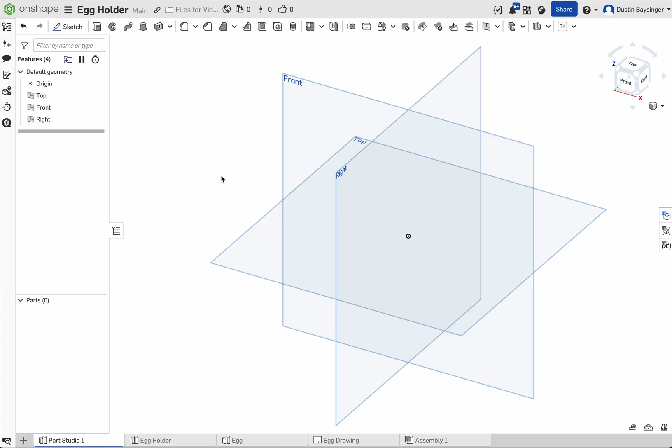First thing we're going to do is open up a new part, and we're going to start on the part that holds the actual eggs. So we click the sketch button, click on our top plane, right click, view normal to sketch plane, and start with a center point rectangle.

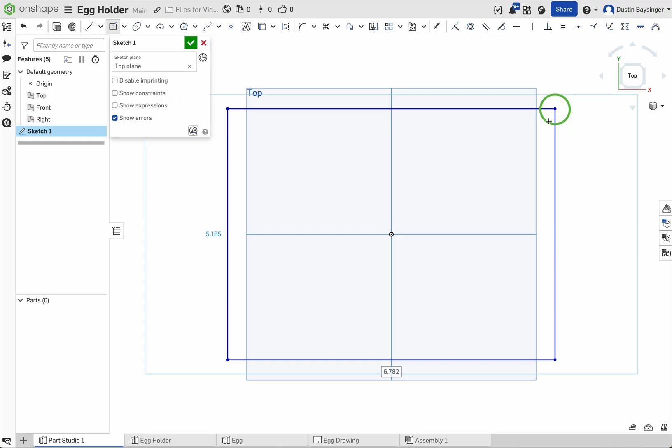We're going to have 3 holes to start out with, and we're going to linear pattern these 3 holes.

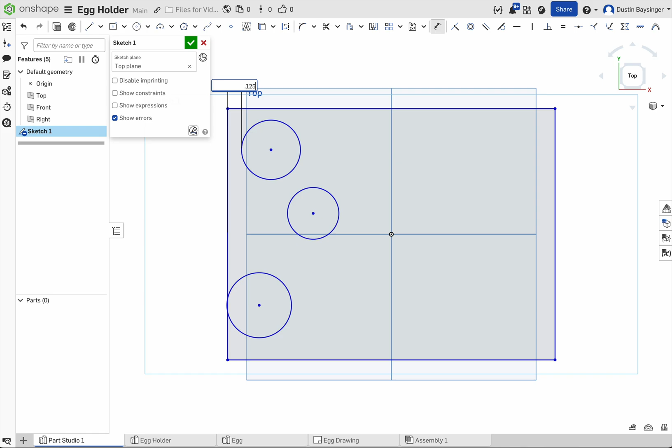So one, we'll start at the edge of our rectangle at 0.125, and we're going to dimension the other side too, and give it a starting point. The actual hole, which I sized based on some trial and error, is going to be 1.4 inches.

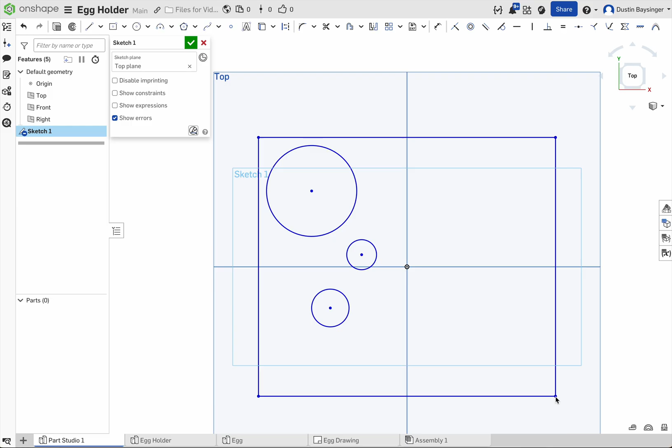That'll pretty much fit most eggs. I've got some small eggs and big eggs that I tested it on, and each of these holes is going to be 1.4 inches.

So we can go up to our constraints and click on the equal sign, then click on each of our 3 circles, and that's going to make each of them the same exact size.

Now these circles are going to be about 1.5 inches away from each other, and we're going to stagger them so that they won't touch, but still use the space efficiently.

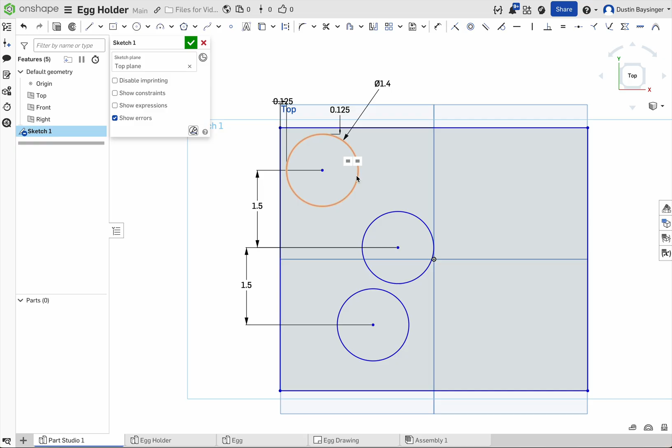Here we're going to create our pattern, and we're going to click on all 3 circles. We're going to use a linear pattern right here.

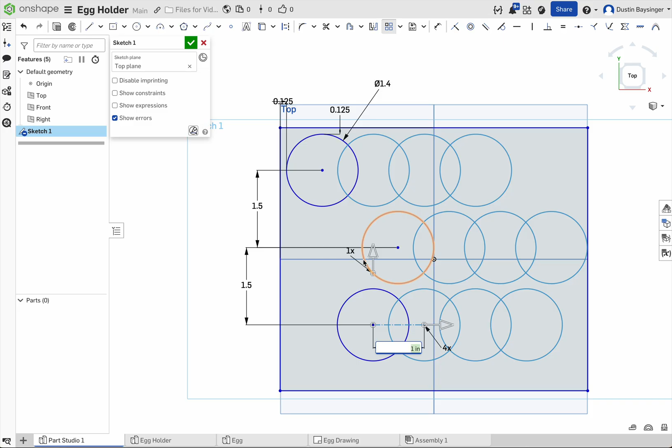And we're not going to do 3 circles, we're going to do 4. That'll give us our dozen eggs. In between each one of these, it's going to be 1.75 inches. That'll give us a basis of where to go with our circles.

We're going to do a left click. That'll make our linear pattern permanent.

Our circles are a little all over the place, so let's set up some constraints so we can pull everything together. This set of circles is going to be at the center point of this, so let's add a point onto that line, and we're going to do a vertical constraint on both points, which will keep everything lined up.

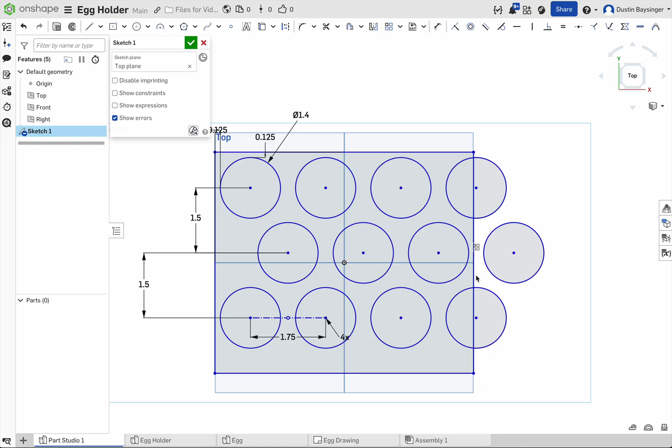We're going to make our rectangle a little bit bigger, and all we want is 1/8 of an inch of material from the outside rectangle to our hole. We'll do that in both directions, and that'll give us our baseline for our eggs.

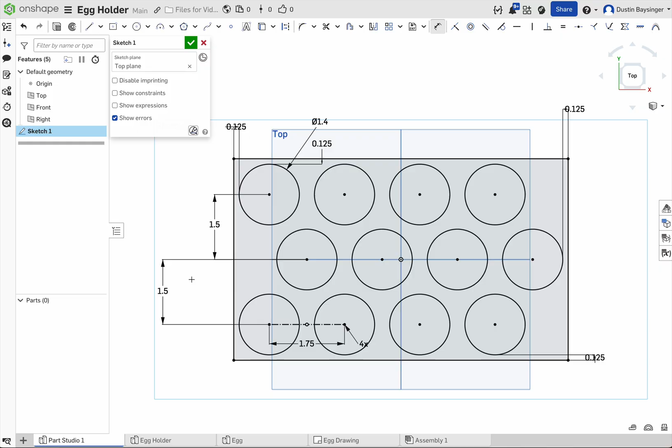Now we're going to click on it and do an extrude. This is going to be 0.1875 inches, to give it a little bit of thickness so it doesn't bend.

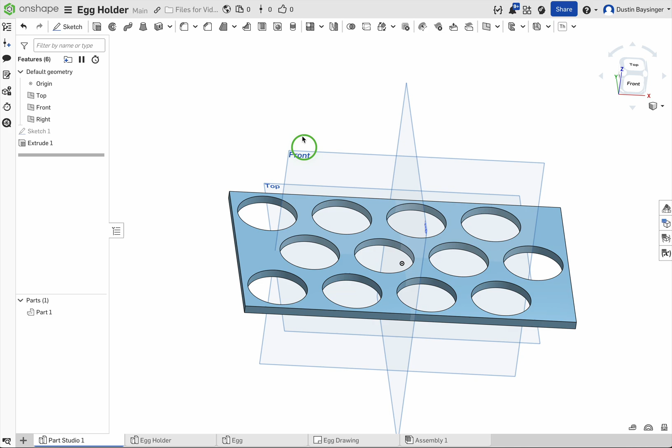Then we're going to start on the handles on each side, which gives it its stackable ability. So we're going to create a sketch on the side, right click, view normal to sketch plane, and do another center point rectangle. We're going to click on the center right there.

This rectangle needs to be lined up with the edge of our base, so we'll click on that. And the entire thing is going to be 3 inches high.

Actually, we don't want the base in the middle — our eggs are going to stick up the top right here. So we're going to take the constraint we have and delete it, and instead constrain that rectangle vertically with the origin.

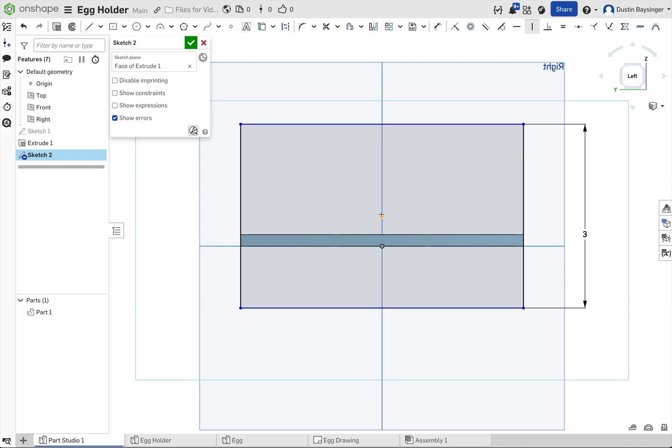Now we'll dimension the bottom here to bottom there, 0.75, and that'll give us the base for the handles.

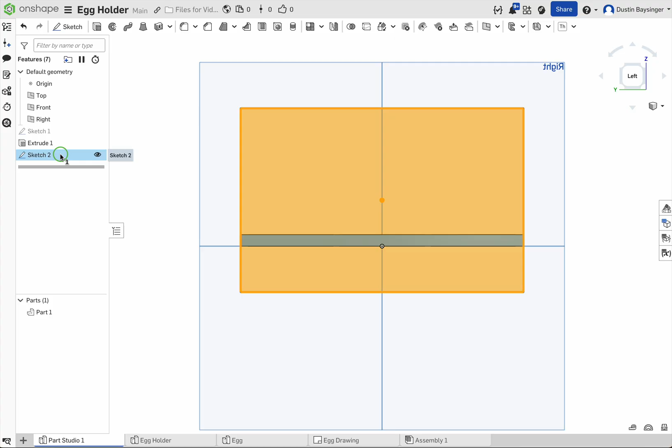Now we'll click on the sketch and extrude. I'm going to extrude 0.25 inches.

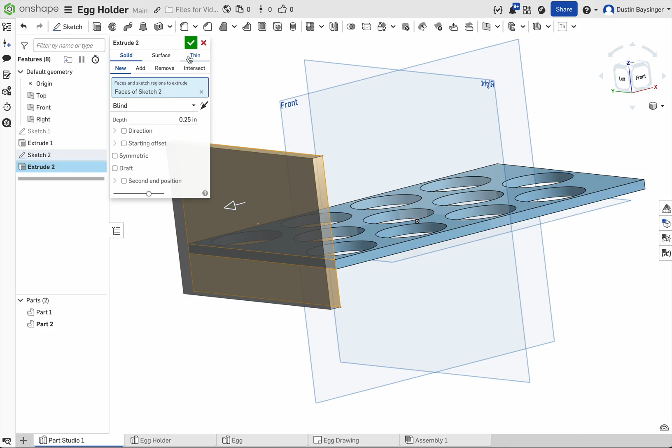Now, I did combine these two parts, the two extrudes, but we're actually not going to want to do that. So go back to the extrude, and make this new instead. Since I don't want to design this twice, one on this side and one on this side, we're going to mirror it once we're done with this side — I can just click on this part and mirror the entire part rather than a bunch of features. That'll make it easier for us later on.

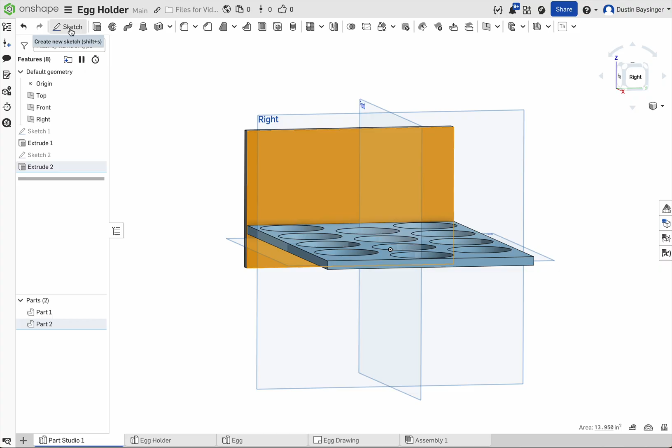Next we're going to make the more stackable parts. Let's create a sketch on the inside, right here. We're going to do a right click, view normal to sketch plane again, and create a basic structure of our stackable area.

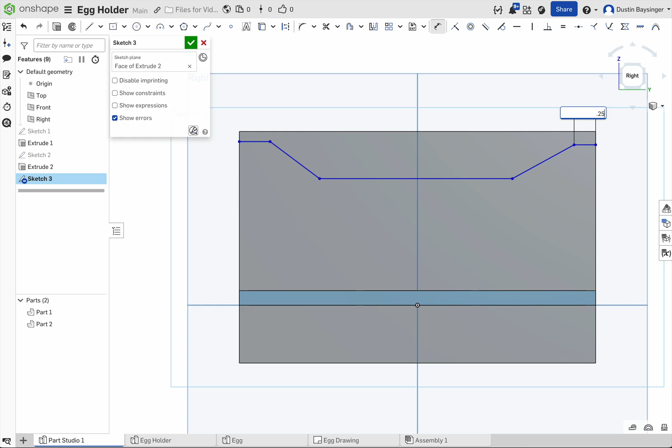So we're going to make this 0.25, and this is going to be 2 inches. But we want this lined up with the center, so let's get a point and create a midpoint — you see how when I go over the middle it creates that constraint right there? That's what we're looking for, and it ensures this stays in the middle of the line.

We're going to do a vertical constraint, click on that point, this point, and that snaps everything in the middle right there.

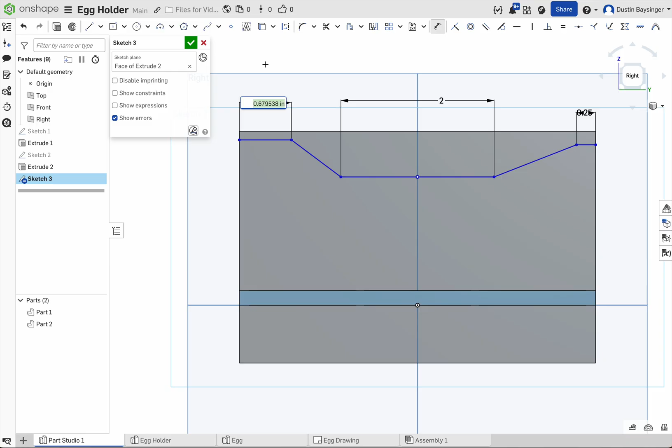Then we're going to want to dimension this, 0.25. The whole thing is going to be 0.5. And it's still not constrained, so I'll add 0.25 for that. That should constrain most of it, except for this side right here.

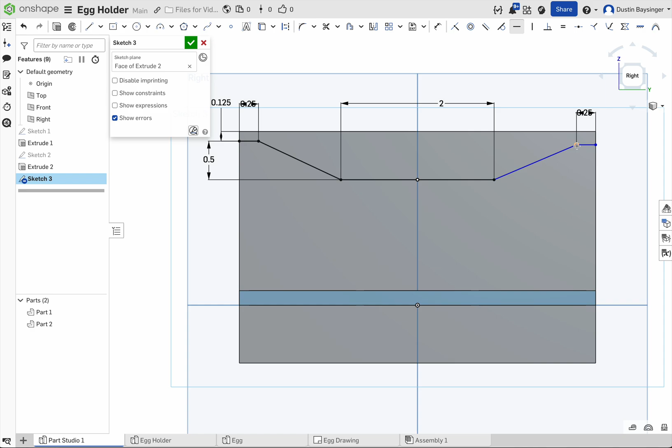And we're just going to make this side horizontal with this one, which squares it all up. We're going to need one more line going from here all the way to here, and we're going to make that 1/8 inch.

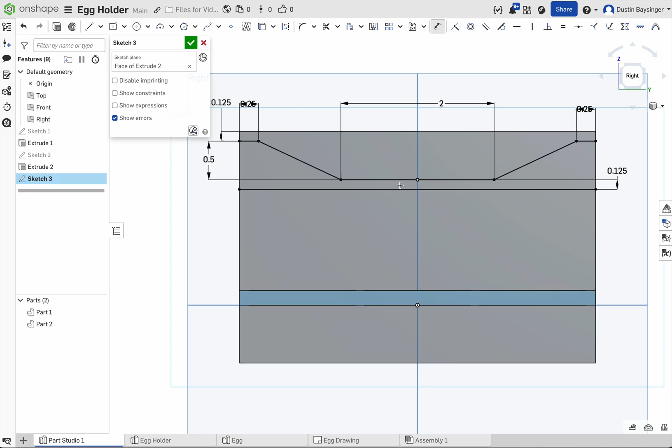And you can see the whole sketch is constrained right there. So now we're going to do two extrudes with this sketch. This top part, we're going to extrude, do a remove, and remove it all the way. So there's a hole right there.

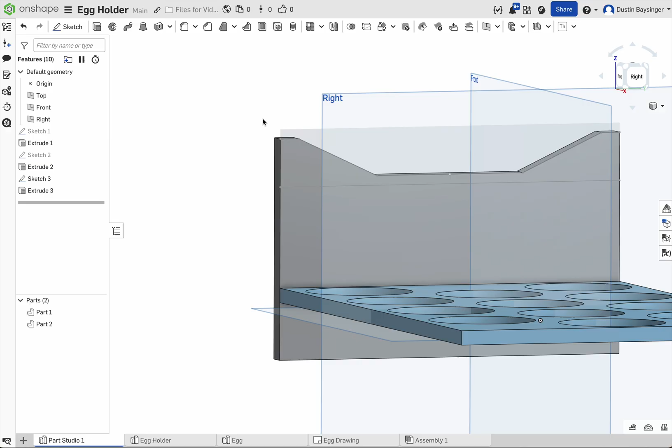Looks okay. Since we need to do another extrude with that same sketch, I'm going to show it again, do an extrude, and click on this bottom part. We don't want this to go all the way through, just 0.125 through. Click on remove. You can see we removed about half the material right there.

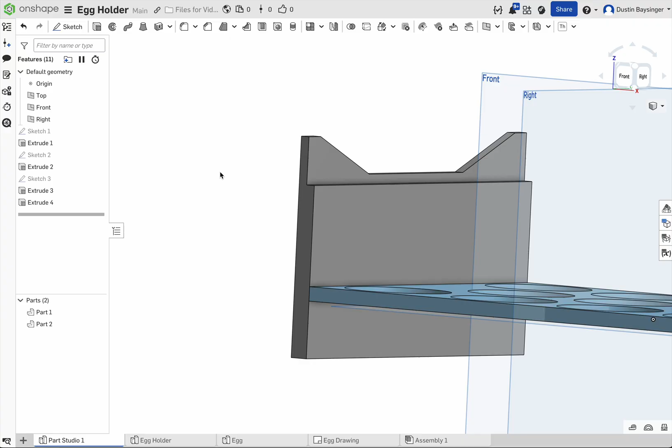So now we don't need that sketch anymore, so you can hide it. We're going to go on the other side and make the same exact thing, except on the bottom, so they seat into each other. Create a sketch, right-click, view normal to sketch plane. We're going to make about the same.

It needs to be straight. Make about the same thing that we did on the top. We're going to need to put this in the middle again, so get a point. Find that midpoint. Create a vertical constraint here.

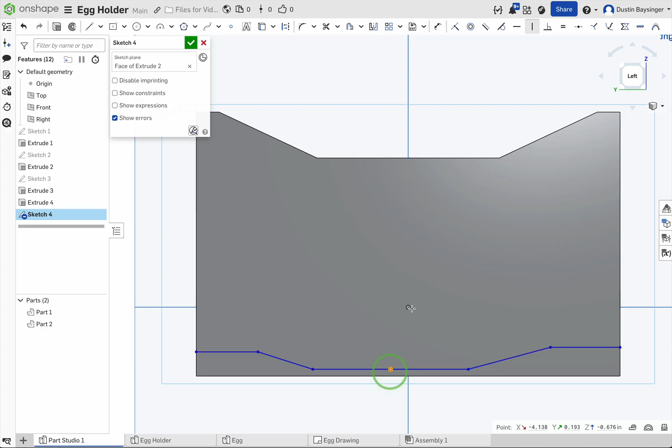This is going to be 2 inches again. From here to here will be 0.5 inches. A quarter of an inch. A quarter of an inch. We're going to make these two sides horizontal to each other. And this went down lower than it needed to be, so let's pull it back up.

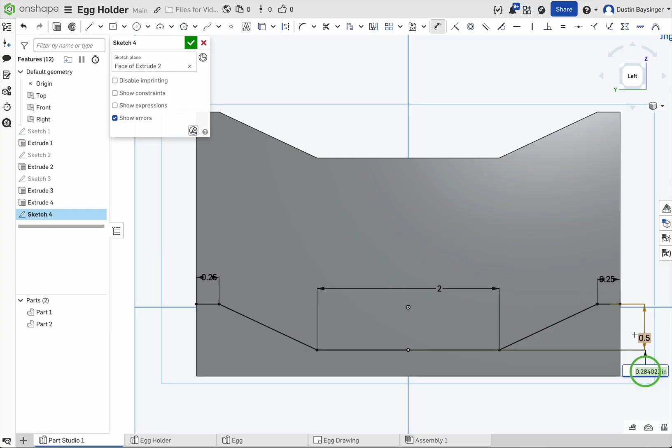That's going to be 0.125. That should be everything, so let's press OK. And we're going to extrude in, do a remove. But we don't want to actually just do 0.125 right here, so that's going to make this and this the same exact size.

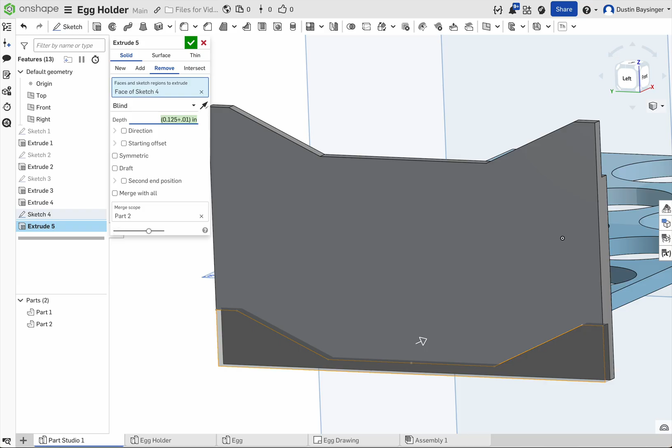And we want this to go inside the other side, so we're going to add a little bit of tolerance. Just do plus 0.01. So that'll make this extrude a little bit bigger than this extrude right there.

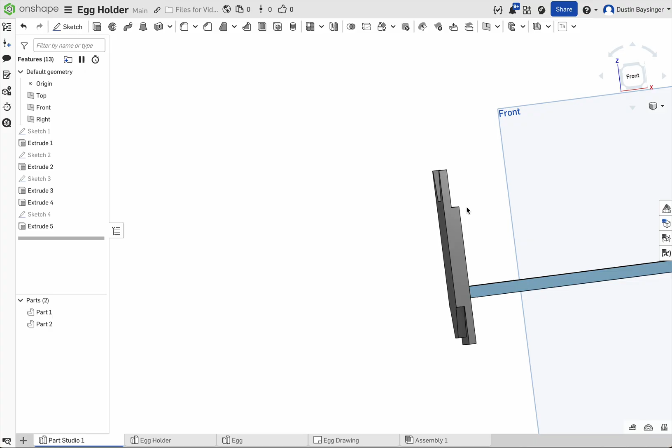So I found that as you're stacking these, this side right here tends to slip off, the bottom part. So we're going to create a little lip so it doesn't slip off anymore. Create another sketch on the side, using the side of this part. View normal to sketch plane.

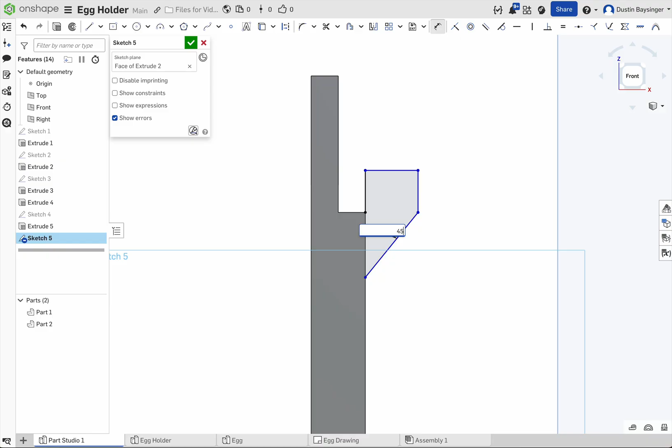And we're going to just make a simple little rectangle right here. This is going to be 45 degrees. This will be 1/16 of an inch, and this will be 1/8 of an inch. Actually, let's make that another 1/16 of an inch.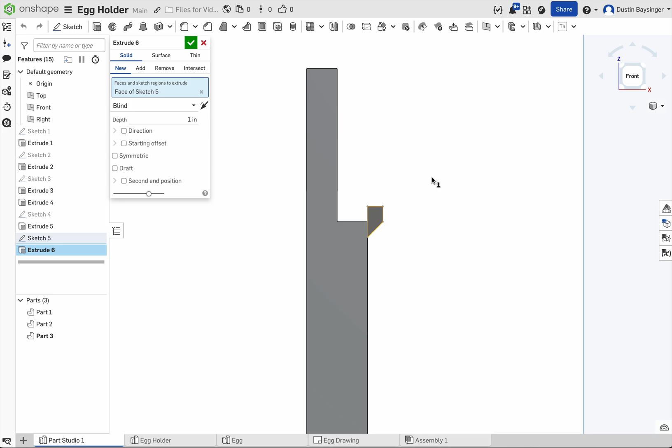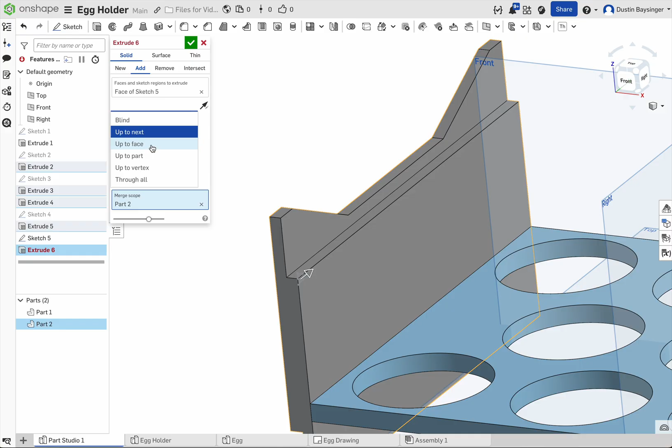Alright, press OK, and we're going to extrude, and that's going to go all the way to the other side. So we're going to add that. Go in the other direction, and let's do up to next. No, up to face. So if we end up changing anything of this, it'll just change with it, and that'll go all the way to that face right there.

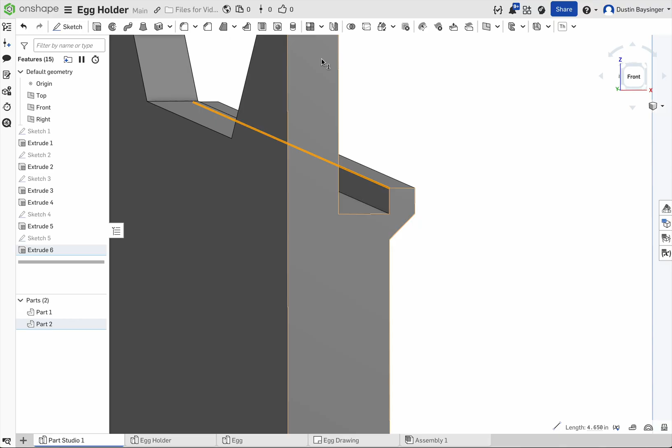Press OK, and then we want this to kind of slide in, so we don't really want this hard edge right here, so let's just create a chamfer on that edge. And that's way too big, so let's do 0, 0, 3, 1, 2, 5. Let's see how that goes.

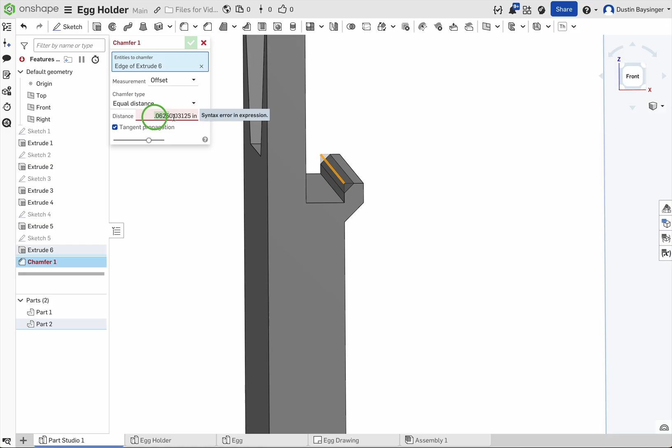It's not quite big enough, so let's do 0, 6, 2, 5. Looks about what we're going for right there. Let's press OK.

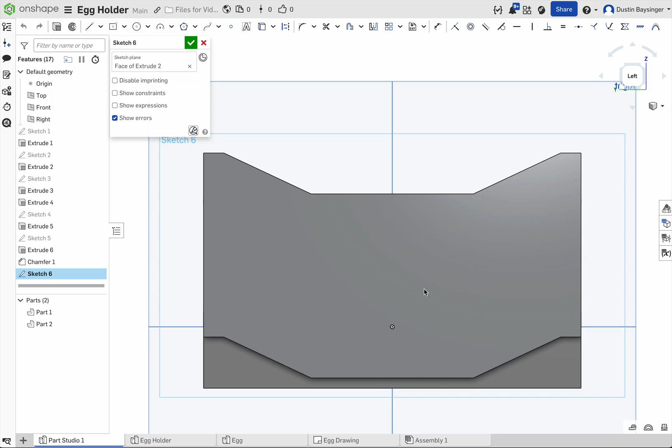Okay, the next part is to create the handle on the side. So we're going to view normal to sketch plane, and we're going to make a slot. That's going to require 2 circles and 2 lines. So right here, circle right here. We're going to want a line going from here to this circle, another line from this circle to this circle.

And we're going to add a few constraints to make sure that everything lines up and creates a slot. So we'll click on the line and the circle using tangent. We'll want to do the same thing for this line and this circle, and this line and this circle. That'll make it so the line comes off the circle properly.

Let's line up the two circles with a horizontal constraint. These circles are also going to be equal to each other. And we'll probably want to center this up as well, so let's put a point on this and do a vertical midpoint.

Let's dimension this. And actually, dimension outside circle to outside circle, if it'll let me do that. And it will. Alright, let's do 3.5. And this is going to be 1 inch.

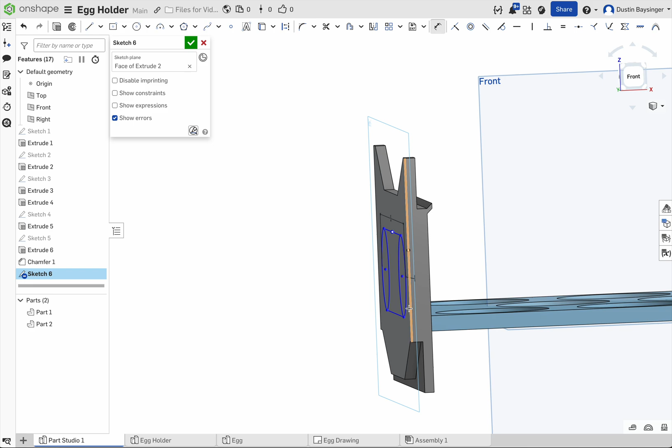Looks about right. And we don't want this to hit into our eggs right here, so we'll have to move it up a little bit. So let's dimension here to here. 0.75.

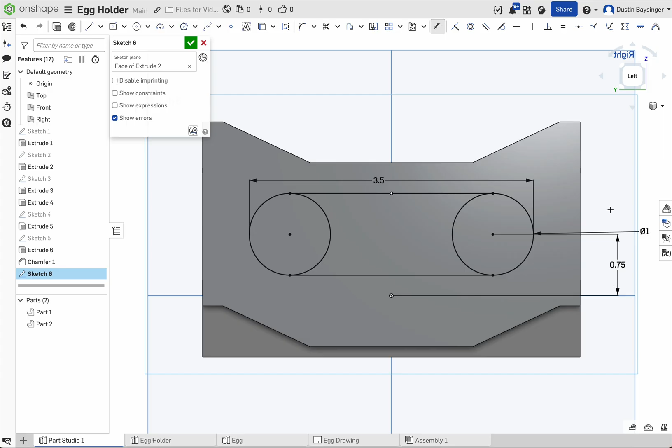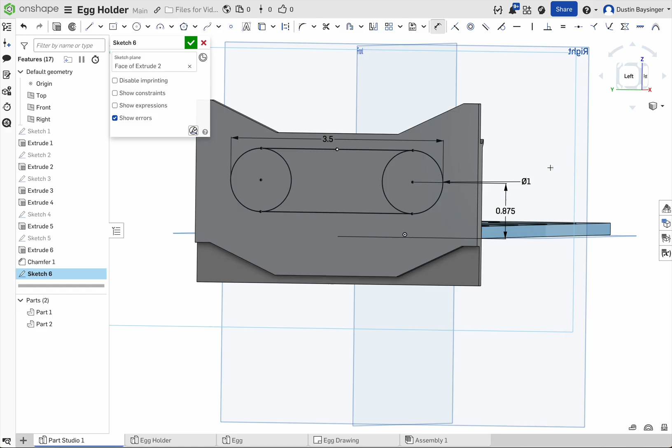Looks like that'll give our fingers a little bit of space in the base. Maybe we can go up a little bit more. Point 875. Let's see what I'm doing on the other side.

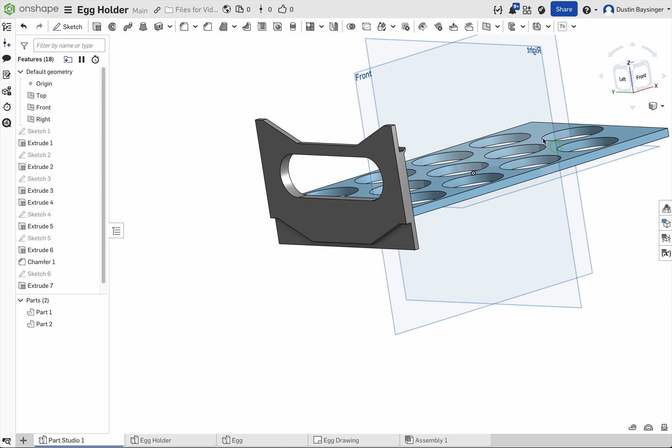That looks like that'll give your fingers enough space in between everything. Alright, let's press OK. We're going to extrude that sketch, going to be a remove. Press OK. And that gives us about what we need for the handle right there, so let's mirror it.

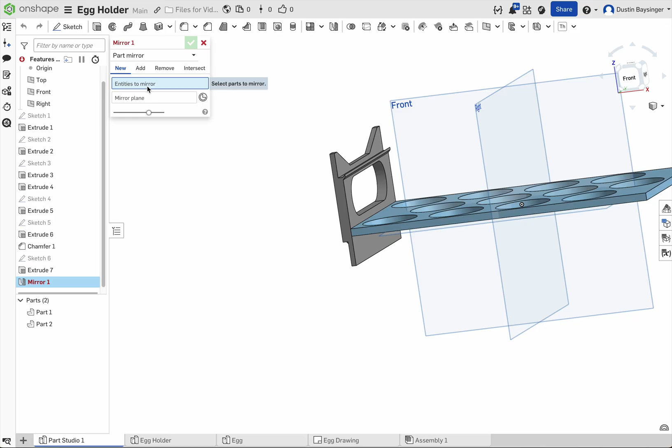So we're going to go over to the mirror button up here in the middle. Click on this part, entity to mirror. Mirror plane is just going to be our right plane. See right there? It mirrored everything.

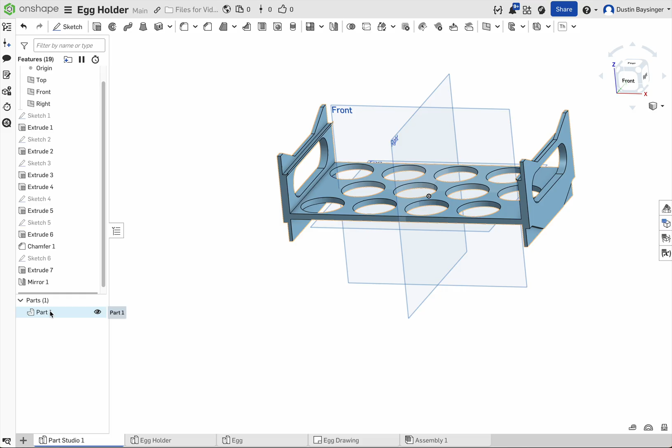Let's merge it with all. That'll give us our single part. And if we hide all this, it gives us our chicken egg holder.